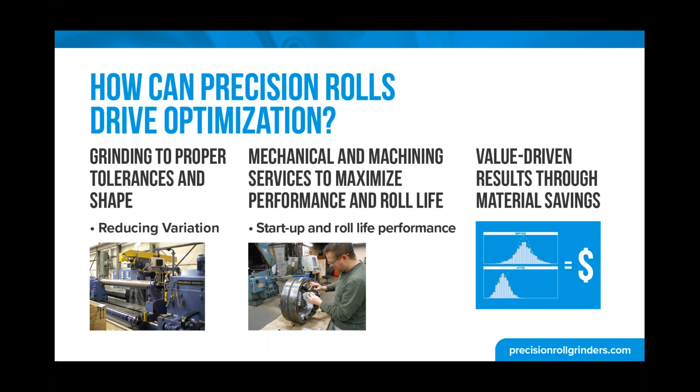At the end of the day, we would encourage you to really look at your roll grinding and roll servicing as a return on investment, as a capital type investment where you should be demanding a return from your provider, your roll grinding and servicing provider. Quite often it is viewed as just a necessary maintenance cost, and we would argue and would encourage you to really consider it as a return on investment. And we'll show you ways that can be proven in your coating operation.

So driving operational excellence with precision rolls. Again, it comes down to reducing variation. And we all know intuitively that we want to reduce variation in our processes. And there are many levers to pull, from the coating recipe and makeup to the application of the coating, whether it be a blade coater, a rod coater, an air knife coater. Rolls is just one piece of it, but we think it's a very, very significant piece. And again, any opportunity that any of us have in our processes to reduce variation, we should take advantage of it, and then statistically validate that we're getting a return on investment for reducing that variation.

So how does variation manifest itself? Well, it manifests itself in machine direction variation and cross direction variation. With respect to machine direction variation, it's eliminating barring, and barring is a term that we use in roll grinding to indicate short-term variation around the diameter of the roll. So circumferential on the roll, you've got variation that almost looks like, if you were to take a reading of the outside of that roll, small gear teeth. And what that is doing is it's inducing machine direction variation, where your coating application is going from thick to thin to thick to thin as a web rides in the machine direction.

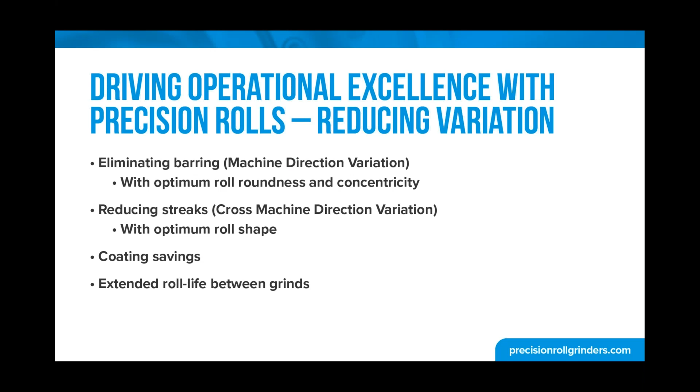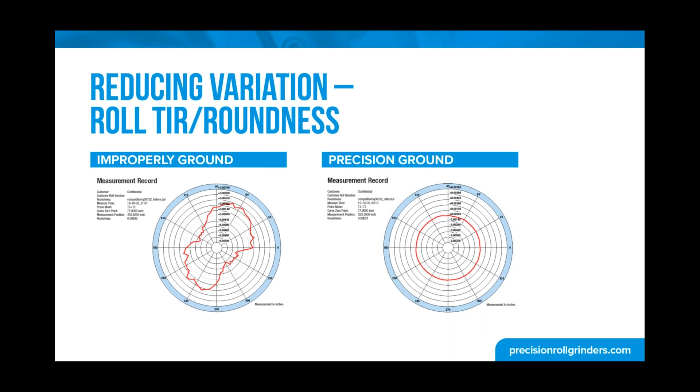Whereas a precision ground roll, although not perfect, because nothing in life is absolutely perfect, but you can see, and if you look at the scale, that scale is very, very slight. You can see that properly ground roll will provide you the proper total indicator run out and the proper roundness to significantly reduce, if not eliminate, machine direction variation in your coating process. And again, it's not necessarily dependent on the type of coater or the way that it's being applied, but that backing roll, any rolls that you have in a coating operation, it's critical that this roundness be precise.

We'll talk a little bit about some of the ways that roundness can become imprecise. And the first is grinding on bearings. And there are a lot of schools of thought out there. It runs in bearings, therefore it should be ground in bearings. And we would encourage you to really think about that. Our answer to that is no. That's incorrect. When grinding in bearings, the roll moves when it's ground. There are tolerances within each bearing. There is bearing play that can't be eliminated.

Gravity affects the roll while it's in bearings being ground differently than a roll that is supported differently while in the machine. It moves in and out with those defects, and roundness at OEM specification is just not possible. Neither is true concentricity. Again, concentricity being the roundness of the roll face with respect to the journal center line. And lastly, the shape, which we'll talk about here in a second, is not attainable either from side to side, from tending side to drive side.

So if you do have a roll grinding supplier that is talking to you about grinding it in bearings, or you're currently grinding it in bearings in-house or in place, we'd ask you to reach out and talk to us about why you should consider not doing that. That roll needs to be ground on its journals, from its journals, to provide the proper concentricity and roundness to eliminate that variation in your process.

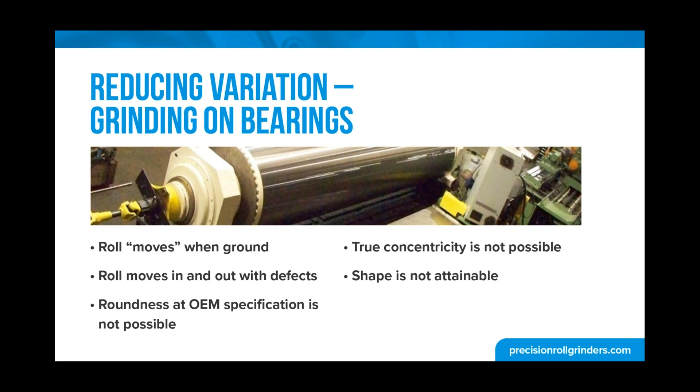Our typical tolerance at Precision Roll Grinders is 5 microns. So we're very familiar being down in this range. 10% of our work has tolerances of less than 2.5 microns.

So when it comes to applying these very expensive coatings to whatever substrate you're using, again, regardless if it's a paper machine applying a coating or a very highly technical medical patch that's applying a coating that's terribly expensive, you have to have these types of really, really tight tolerances. And then you should be able to work with your supplier to statistically validate those savings because of that reduced variability.

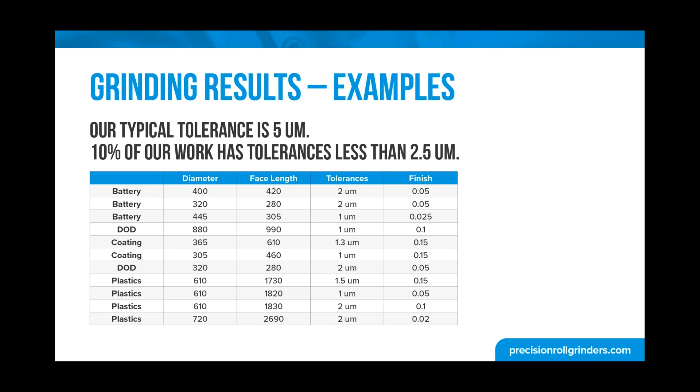You can see some of the finishes that are typical on the right hand side as well. Whether it be chrome roll application, rubber roll, steel, the finishes are critical too. Again, we would encourage you to reach out to Precision Roll Grinders or your current roll supplier and really be cognizant of where those finishes need to be to have the proper optimization of your coating.

So at the end of the day, as we mentioned earlier, it's got to pay for itself, right? So reducing variation in coat weight, uniform material thickness, reducing material usage due to a thick or a wavy sheet. And again, we're not necessarily talking about the substrate, we're talking about the application of the coating on the substrate. And with any production of a web type product, whether it be coated or even uncoated, it's generally the case that we'll overcompensate to make up for variation, and that overcompensation is material loss.

It's excess coating that is being applied to make sure that we don't have thin spots, that we don't have this barring showing up in the coating with the machine direction variation, to make sure that if there's a thin spot on the shape or the cross direction, that we're putting enough coating on to make up the difference. And again, it doesn't take long when doing so to become very expensive. It's reduced defects due to what we were just mentioning on localized thinning in a material profile.

The end result is end product construction that's more consistent for your end use customer, whether that end use customer be directly to the consumer. Most generally, it's to a converter that is turning it into packaging or turning it into some other product for the consumer. The conversion of that product becomes much more consistent just because of the reduction in variation and the consistency that you're now providing your customer.

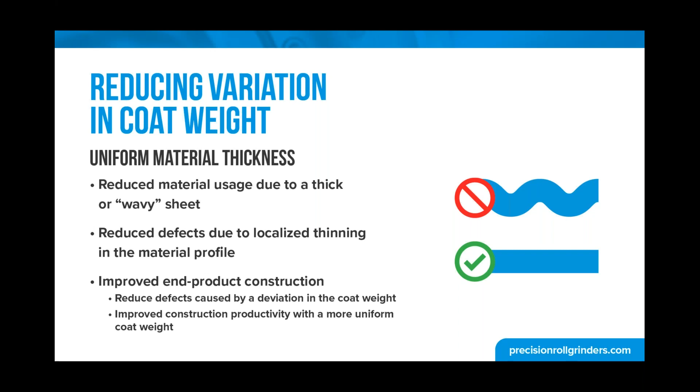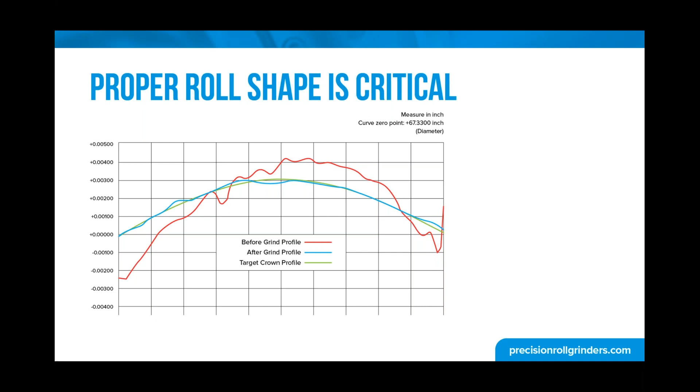And again, rolls are critical. So proper shape. This is an actual before and after grind profile, and then the target profile is in green. You can see at times this one happened to be crowned, but you can see the peaks and the valleys that you don't want. You can translate that directly to what may be happening with your coating. And here's an example of that.

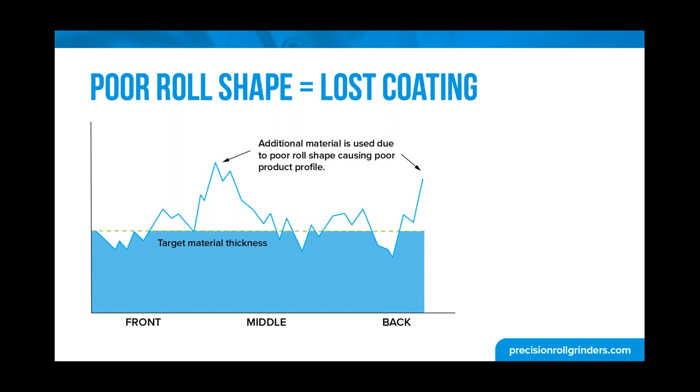And because you've got an erratic shape in your coating profile, unfortunately, what that's doing is driving those peaks, right? And the additional material that is shown under those peaks is unnecessary and is lost. Again, any coating application with any substrate, we've seen examples of this. If we're able to produce a much better coating profile, you can see that even if that valley on the right-hand side is not corrected, a more consistent profile in the remainder of the roll allows for dramatically reduced coating usage.

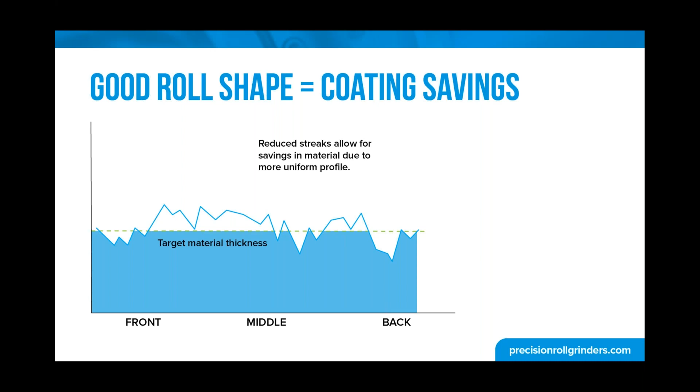Even though they may have been designed as the same machine producing the same product, we all know, having been in manufacturing most of our careers, that they don't act the same. Shucks, sometimes they don't act the same on Tuesday as they do on Monday, right?

So we would encourage you to really demand from your roll grinding and servicing provider a partnership to truly look at the return on investment. Let's validate whether or not we're saving the money that we're spending and making a good return on that investment with respect to our roll services.

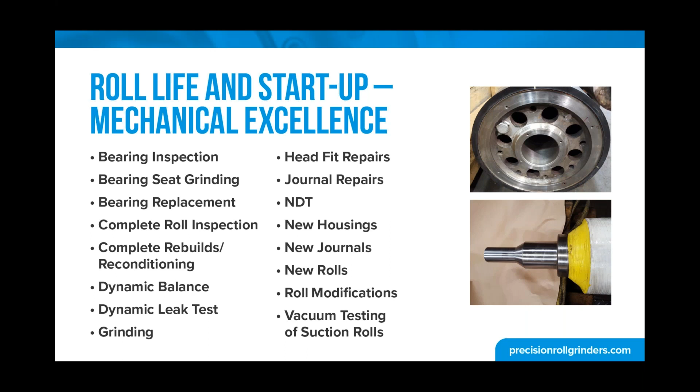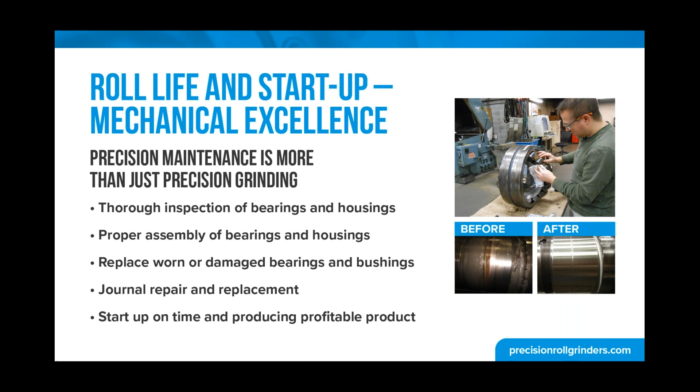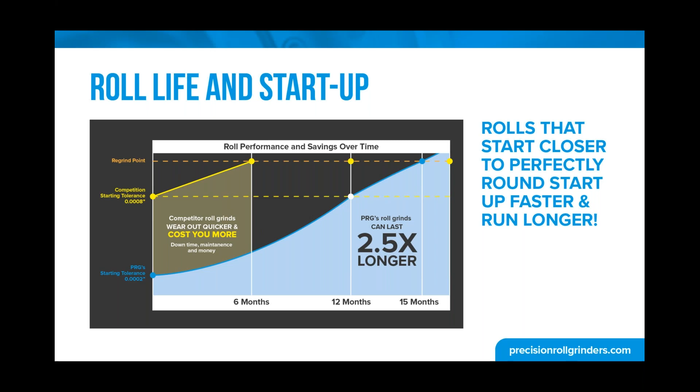Again, this is not a linear relationship. The wear on a roll is a function of its deformation. So as deformation increases, the wear increases exponentially. So the closer you can start to perfectly zero, the better life that you're going to get out of that roll. And throughout that life, the more consistent product you're going to produce, the more consistent coat weight you're going to produce throughout the life of that roll.

So at the end of the day, again, be asking of your roll grinding and service provider, what is the value? What value is being provided here? What is the return on this investment I'm making to have you grind and service my roll, particularly in a coating application? It starts with data: coat weight variability, actual coating usage, quality parameters around your process, and really doing data analysis on it.

To provide value, you're able to reduce variation, and because of that reduction in variation, you can shift your process. With respect to coating, we were putting 10 pounds per unit on. Now we're able to put 8 pounds per unit on because we've decreased the variation. We were able to shift that process to a more optimal and profitable place.

And ultimately, can a predictive equation be developed and modeled that says your roll life at 6 months looks like this, at 8 months looks like this, at 12 months looks like this, or at 2 years looks like this, and let's predictively determine when grinding and servicing needs to happen, and predictively determine the kind of quality and the kind of variation we're going to have over time. That's a commitment that Precision Roll Grinders makes to their customers.

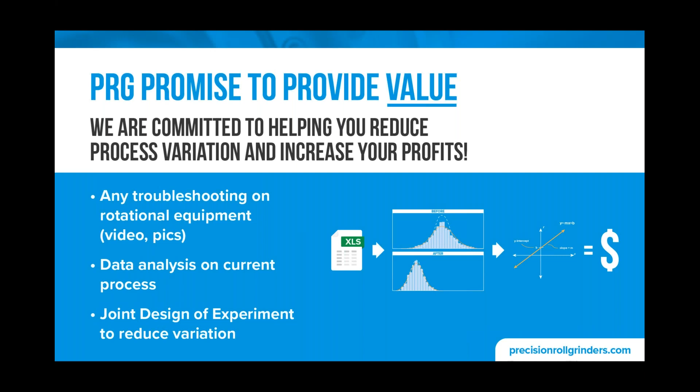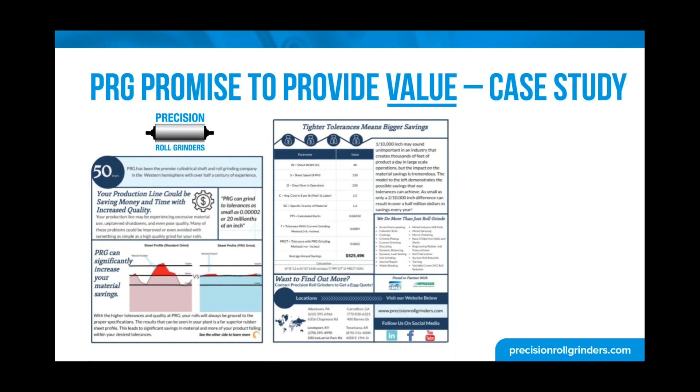At this time, we'll open it up for any questions. I'll go ahead and unmute. Again, we just wanted to quickly go through, we've taken about 25 minutes here, why the roll tolerances, why the roll shape, why the roll mechanical servicing is so critical in coating operations. This has been a broad overview. We would encourage you to reach out directly to a local account manager or to Precision Roll Grinders corporately with any questions that you may have, or any questions around the type of value-added studies that we do.

Okay, so everybody at this time is unmuted, and we'll look for some questions. One question came up: how long do the value studies last? It really depends on your operation and what you want to study. In many operations, there's online platforms that are measuring coat weight. They're measuring other process variables that you have. If that data is readily accessible, then it's relatively quick to do the statistical modeling on that. We've seen everything from studies that take 3 weeks to get enough data to those that take outwards of 6 months to provide enough data to really take a look.